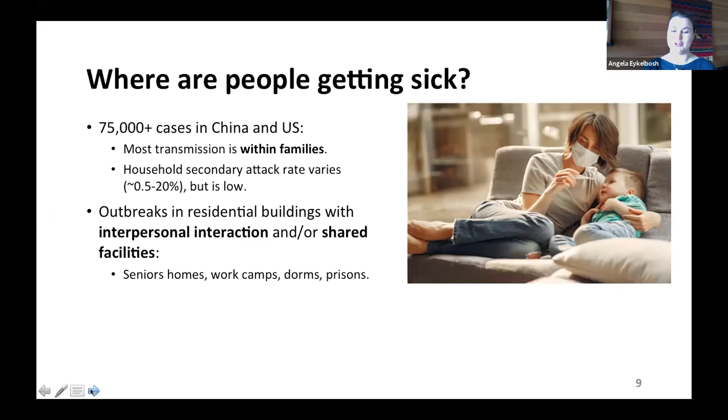We also have had, now you can see in the media, many outbreaks in residential buildings, but all of them have some sort of interpersonal interaction or shared facility aspect to them. So long-term care homes and seniors homes, they have shared caregivers. They have social programming, the bus to the casino. Those are all ways that the virus can spread between close contact between people.

And then in other settings like work camps and dorms, there may be shared kitchens and bedrooms and lounge areas. And then finally in prisons, everything up to the bathroom is shared, right? So there's zero personal space in a prison, which makes them very high-risk environments for this disease.

There are specific instances in which droplet or aerosol transmission has been implicated over a short range. So there was a restaurant in China where one diner seems to have passed the infection to other people sitting in the stream of the air conditioner.

There was a Washington choir where all these people got together and sang at each other for a couple of hours, and something like half of them got sick. There was also a Korean call center that was very crowded and poorly ventilated, where the disease spread pretty far. And this was, again, not long range transmission, it's short range transmission. People are together and that's why they're getting sick.

As for our MURBs, I have yet to see any evidence of aerosol transmission or massive outbreaks in MURBs, or situations where you have reason to believe that people on different floors or in different suites are getting it. That doesn't mean it's not happening. Absence of evidence is not evidence of absence. However, because all these other outbreaks are popping up, the fact that they're not popping up in these particular kinds of buildings is somewhat promising. So we'll just say there's no evidence to date, but I would love to hear if anybody has information that I don't have.

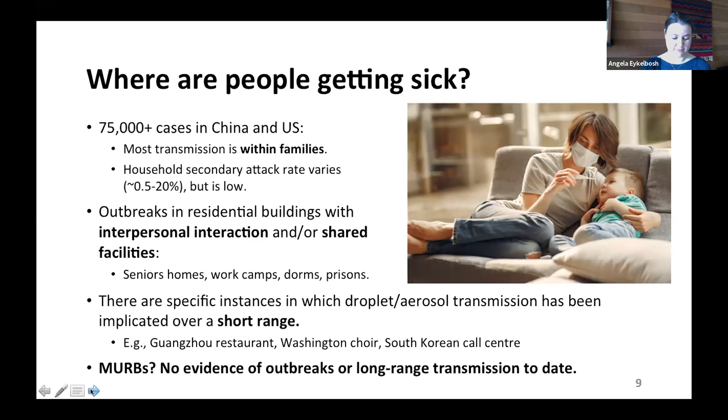So what does this all mean for our MURBs? Well, it means that we need to keep people away from each other. This is critical. So amenities that cause people to gather need to be closed. You need to limit access in elevators and laundry rooms. If they're small laundry rooms, you need to think about how many people can be in there. You need to discourage gatherings. You need to discourage lingering. So, you know, get your mail and then go to your suite.

Don't hang out and be in that space, because you're putting your droplets out into that space, which is what we don't want. And then of course we need to have meetings differently. We can't have face-to-face meetings. So having council meetings and AGMs and these sorts of things by electronic or virtual means is what we have to do. We also need to enhance cleaning. So high-touch surfaces need to be cleaned frequently, and I'll talk about that a bit more.

We also need to prevent cross-contamination in laundry rooms between sick households and not sick. Also in washrooms. And the NCCEH webpage has a poster for this. If you need something to just stick up in your building, we've got a really good one. You also need to close what you can't clean. If you can't keep something clean based on the usage of the thing, or you can't supervise it to ensure that it's clean, or that people are respecting social distancing, then it's probably preferable to close it. That's not an order, but you know, it's common sense.

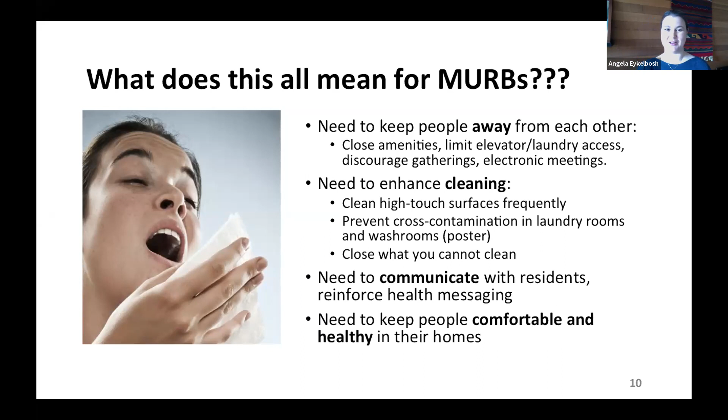So cleaning and disinfection. I'll try to get through this pretty quickly. The Public Health Agency of Canada is recommending manual cleaning with soap and water and/or a disinfectant product. So a lot of people are using those 2-in-1 wipes, which clean and disinfect. Those are different things. Cleaning is removing the soil. Disinfecting is killing the virus. You have to do both. So those 2-in-1 wipes only actually work on lightly soiled surfaces, so keep that in mind.

Some buildings have been reaching out and saying that they're buying specialized disinfectants. That's not necessary. This virus is not a superbug. It's easily killed. And in fact, Health Canada has a product list on their website of all the different disinfectants that you can look to buy. If you need to find one, then you can look on that website.

So frequency of cleaning of the high-touch surfaces, I should specify, is determined by traffic. So recommendations range from 1 to 3 times a day. The pandemic influenza plan here in BC says 2 times a day. However, you have to recognize that traffic may vary. Also, it may be very difficult to contract cleaners right now. So that's a problem that many people have been sharing.

So vacuuming, I've had questions on vacuuming because it creates dust and it can re-aerosolize droplets that have fallen on the floor and dried out. So the pandemic plan for vacuuming says to use a vacuum with a HEPA exhaust filter, and to make sure that the exhaust is not blowing a jet that can re-aerosolize things, but is actually a diffuse exhaust.

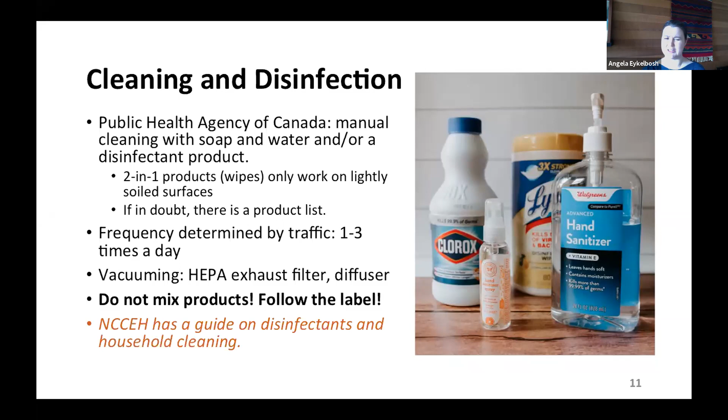And so it's very, very important to always follow the label. Make sure it's being properly diluted, use gloves, use the product properly. It can be very dangerous if you don't. And we actually have an NCCEH document on disinfectants and household cleaning on our website if you want more information on that, especially bleach. Bleach should be used very cautiously.

So spraying and fogging is interesting. People are spraying and fogging, not so much in Canada, but elsewhere, both indoors and outdoors, and they're spraying things like bleach, dilute bleach. Some are using hydrogen peroxide. There's other products that are used indoors because they're not as damaging. The issues with spraying and fogging is that they're going to have very reduced effectiveness on soiled or porous surfaces. So they may not be a good, clean solution.

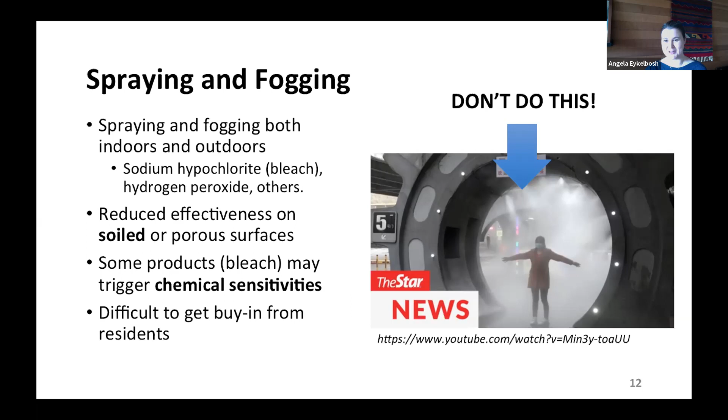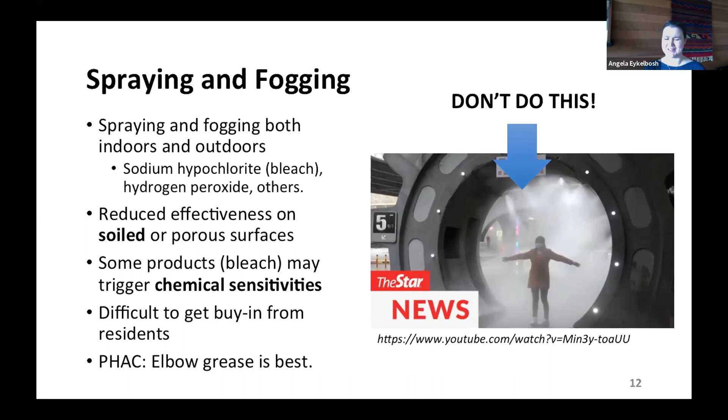They're also not a one-time treatment. If you fog today and somebody goes through there, you must fog tomorrow. So it's not a one-time thing. Some products, especially bleach and others actually, can trigger chemical sensitivities. And for that reason, you may have a lot of difficulty getting buy-in from your residents if you want to try to do this. So overall, Public Health Agency of Canada says elbow grease is best, manual clean, and don't do this thing, what they're doing. That is an extreme example.

So personal protective equipment for staff and cleaners is something we get a lot of questions about. The first best piece of advice is you should always use PPE as per the label on the disinfectant product. So if it says use gloves, use gloves. They can be very damaging to your skin. If you don't have gloves and wipes, for example, then reusable products are also okay.

For rags, you have to launder and dry hot. And for gloves, like kitchen gloves, you just take them off and dry them, and then you only use them for that purpose. You don't try to keep using those over and over again. Or you don't try to use those for other parts of other cleaning, like cleaning in your home. If you're using them for the elevator, they're only for the elevator.

Masking is a really big question. So does your cleaner need a mask? So generally, if the cleaner is in close contact with other people, then yes. However, if they're not around people generally, then they don't need a mask, unless he or she is creating dust.

So even pre-pandemic, if your staff member, your cleaner, is doing something like beating carpets, or they have a really bad vacuum, or they're doing something where they're creating a lot of dust, that's an occupational health hazard, and they need to be wearing a dust mask. So that's regardless of the pandemic. And then finally, some people may wish to use a non-medical cloth mask to protect others, and that shouldn't be discouraged. But if you need more information on masking, the NCCEH also has a guidance doc on masking.

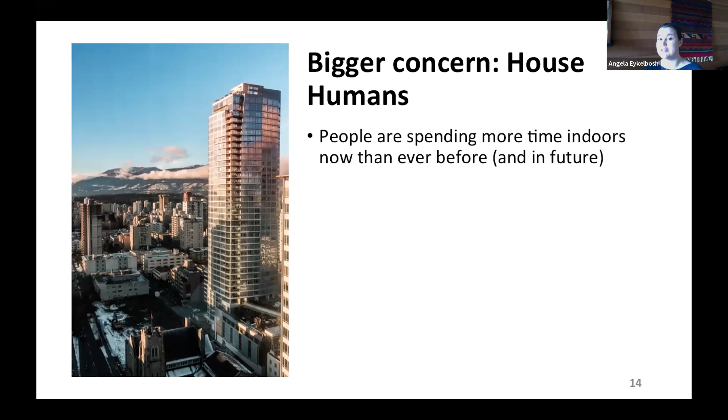So our bigger concern right now is actually house humans. And that is because people are spending more time indoors than they have ever before. And this is likely to continue for some time into the future. So we really need to help people stay healthy indoors. And obviously that happens via a variety of means. But one of the ways that we stay healthy is we are very dependent on receiving healthy indoor air when we live in these MURBs. So this is more important now than ever, that your building ventilation system is performing as it's intended.

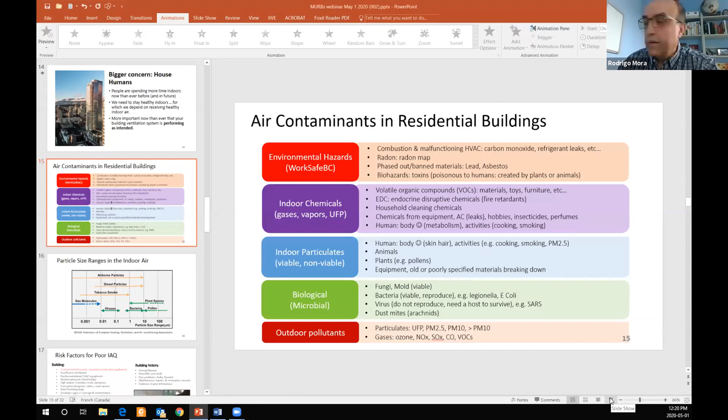So I'll talk about ventilation and air quality. So let's get started with the question: what is in the air we breathe? Unfortunately, we take our air for granted, and we don't realize that air has a lot of stuff. We have gases of nitrogen, oxygen, water vapor, plus so many pollutants that we cannot see. This is just a sample of things that could be in the air. So we have to realize that; that's the first thing.

What can make us sick? A lot of stuff in the air can make us sick. And where does it come from? Well, it comes from indoors, but also from outdoors. The other important thing is that sometimes we rely on our nose to tell us what's in the air, and our nose is not a very reliable sensor because we get adapted. Sometimes we smell things, then we adapt and get used to them. And sometimes we don't smell things that are in the air. So we have to be careful about that.

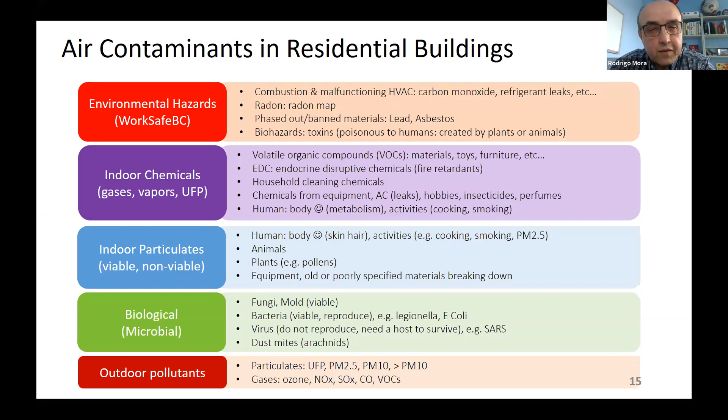So this is for you to be aware that ventilation in buildings, especially in multi-unit residential buildings, is not designed for pathogens. It's designed to dilute lots of stuff that could possibly be in the air in our buildings. So here you can see the range. There's so many particles. The particle size is very important.

What is in the air can be divided into gases and particles. For example, tobacco smoke has a big range. It contains gases, it's an aerosol, vapors, and particles, small and big, so it can travel very far. One thing from the size is that the smaller particles, intuitively, travel farther. The bigger ones stay closer to the source. So we know that.

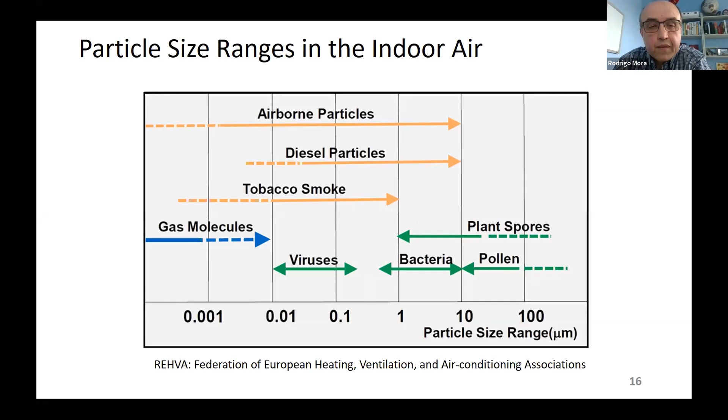We see here the viruses. About 10 microns is the range of the size of particles that remain airborne. Again, the smaller tend to travel farther. The bigger ones, by gravity, tend to fall near the source. Cooking, for example, is like tobacco smoke. It produces gases and particles, and that's why it's so important to have our kitchen exhaust range working when we're cooking, because it produces so many things.

Okay, so we know there's a lot of stuff in the air that can make us sick. So there's a list here of the risk factors for poor indoor air quality. What should we look for? What should we be concerned about in our air quality? We shouldn't be concerned, actually. What Angela was saying is that as long as we behave well. There are many studies that show that indoor pollutants can make us sick. So many things in indoor air can make us sick.

But one thing in common is that our behaviors in our homes are a big contributor. For example, if we produce a lot of moisture and don't use our exhaust fans from the bathroom or the kitchen, we're accumulating moisture, and moisture is like a catalyst for many bad things to happen. So occupants' behaviors are important, and of course the building and its history, what happened with the building in the past. This is a list of things that can happen. Here is the bathroom exhaust and the kitchen, and we have to use them. That's probably the message from this slide.

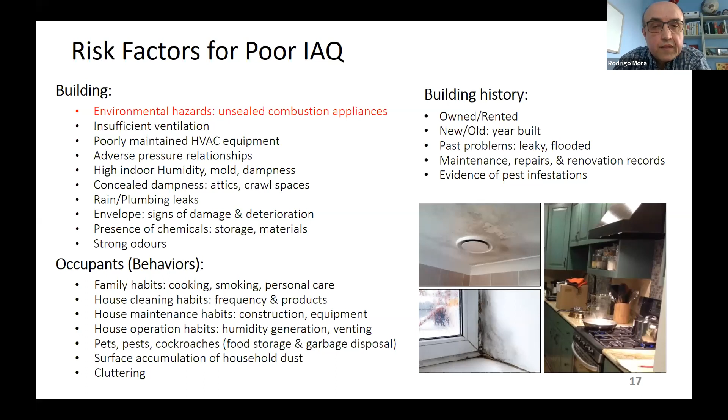So what is ventilation? The definition is important. Ventilation is the intentional introduction of outside air into a space. We're bringing outdoor air that is supposed to be fresh. Typically, we don't expect outdoor air to have viruses or human-generated pathogens, especially in a city like Vancouver. Of course, in an urban area, maybe traffic-generated pollutants and so on, but certainly not pathogens generated by humans. So that's very important.

So what is the purpose of ventilation? One purpose is health. We want to maintain the health of people through good ventilation. Important in the health definition is contaminants at harmful concentrations. Ventilation wants to dilute contaminants so that they don't reach harmful concentrations. That's the goal. There's so many things that could be in the air, and in part we're responsible for those things. So ventilation is meant to maintain concentrations very low, below harmful levels.

And comfort is another factor. We ventilate for comfort because very often we have things in the air that are not harmful, but they produce odors that we don't like. So health and comfort are the two important goals of ventilation.

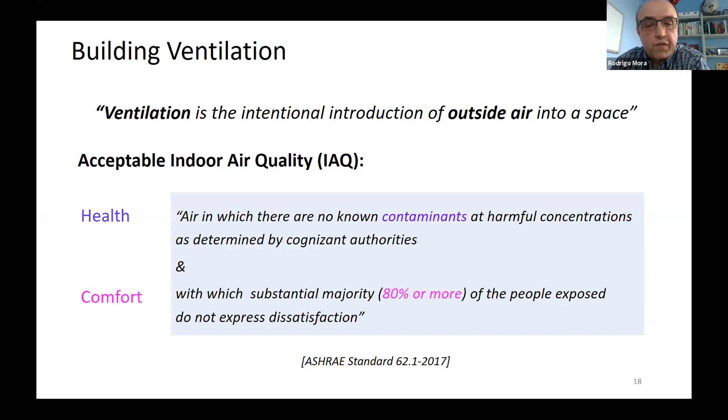So one important thing here: this is a very short time, I cannot be very specific, and there are so many possible cases, so many possible scenarios of operation, configurations of systems. So I want to try to follow a principles-based approach. For us to understand what's going on, we know that air carries particles, gases and pollutants. So basically it's important to control airflow.

So for airflow, in this figure we have the 4P ventilation principles. We know the pollutants; try to be aware what pollutant sources could be in the air. Where are the sources? In our case, humans are the sources. Very often, like you saw in the previous list, the source comes from many possible places. But the important thing is to get informed about the kind of pollutant that is in the air.

Then the driving forces: what drives the airflow that carries pollutants? We have natural and mechanical forces. Stack effect is like a chimney. The building acts like a chimney and drives the air from the bottom up to the top. This is very strong, especially in high-rise buildings and in cold climates, because the temperature difference between indoors and outdoors is high in winter. So stack effect is a strong force that can sometimes overpower the mechanical system.

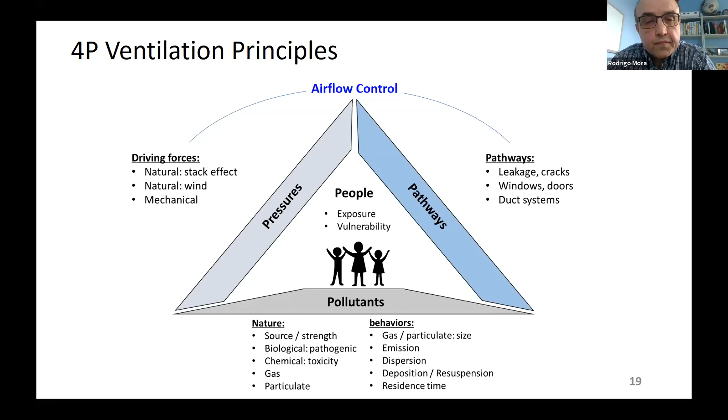Coming back to the principles, there are 5 ventilation strategies that every ventilation system needs to follow. All ventilation systems are not perfect, but they have to follow these principles and strategies. The first strategy is source control: control the pollutant at the source. You replace it, remove it, isolate it.

Examples in residential buildings: the kitchen exhaust fan removes the moisture at the source. The bathroom exhaust fan; the kitchen, with all the cooking-generated smells and pollutants, and also if you have gas burners that have incomplete combustion, you have to operate this exhaust. In a parking garage there's a source of pollutants, so the parking ventilation has to be operational. So this is source control, number 1. I think the list is in order of priority.

Then we have dilution ventilation. Ventilation dilutes, based on the definition, pollutants to keep them below harmful concentrations. So that's very important. Dilution. We need to bring in outdoor fresh air.

The third strategy is contaminant dispersion control. Basically, the rule says take the air from the cleanest areas to the dirtiest areas. For example, in a house or an apartment building, the air moves from the bedrooms and living areas towards the kitchen, the bathrooms, the laundry, the storage areas. It shouldn't be the other way around. This is what is called a cascade effect, from clean to dirty.

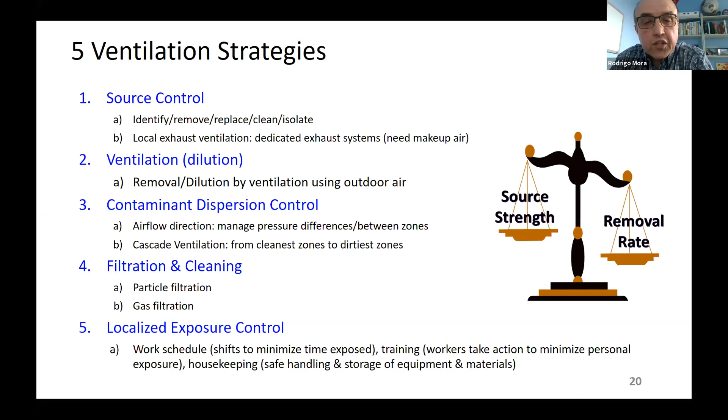An important thing is this balance; everything is about this balance between source strength and removal rate. The removal rate is provided by ventilation, removal of contaminant by these 4 strategies. The first 4 strategies, removal rate. So obviously you want to bring more ventilation to make sure you remove these contaminants at the source or maybe in the air. So removal rate is important. Again, it means bring more air, more fresh air.

And then the source strength, well, it depends on how many people in this case are sick, and if they're concentrated in a place. And if you see a multi-unit residential building, what are the chances that people are spending hours in a place, and they're sick? Well, probably the suite. You're spending most of your time in the suite, so this is probably the most likely source, if you consider that people may be sick. In the corridors, like Angela was saying, people move very fast. So again, source strength is a function of time. So anyway, that's the balance.

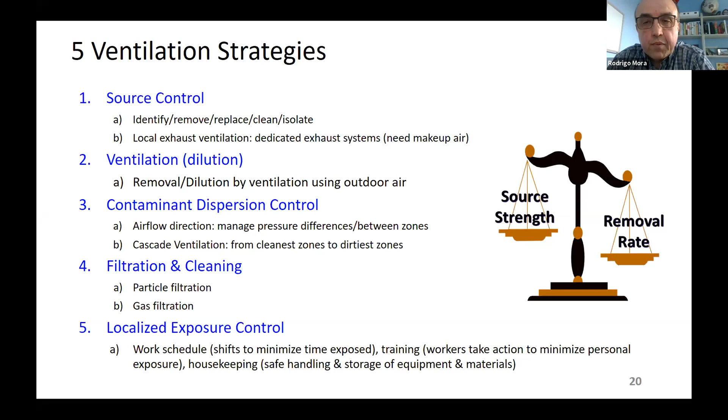That's another important factor. Next thing, we have 4 elements of ventilation plus 1. Now we have heat recovery. So in this slide, I'm going to illustrate how they work. First, again, we have outdoor air. Typically in multi-unit buildings or in residential, this is 100% outdoor air. So it's an air handling system with fans and so on. And now we have heat recovery too in many new buildings. So outdoor air, that's the first element. 100% outdoor air is not polluted with human-generated pathogens typically.

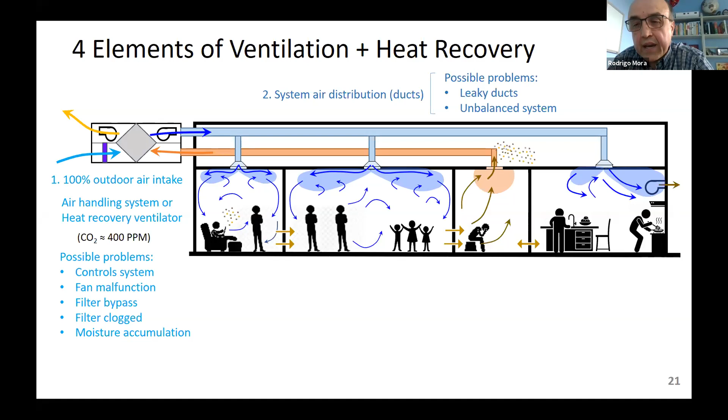Then we have to take this air to the places. We use a distribution system through ducts. So we bring the air from the air handler, using ducts, into the rooms. And then we have air distribution within the zone. So air starts moving and circulating within a particular room. And here, what Angela was saying is important. When there's many people crowding a room, that's probably where you could see that the risk is higher. So fresh air is meant to bring in and dilute anything that could be in the air. Basically, that's the idea. And then the 4th element is air circulation between zones. So air moves between zones following the strategies that I mentioned before.

So if you see this figure, how is the air? If there's a pollutant, typically pollutants in this case are generated by people. We don't expect to have the pollutant in the duct system or in the outdoor air. It is where people are. So in this case, where do we expect to find a pollutant? Where people are.

Another important concept is the age of the air. New air is fresh. So where we have ventilation coming directly into a space, it is fresh air, new air. Then air circulates to other places, it is semi-used air, and then it becomes used air at the very end, in places that you expect are the dirtiest areas. Again, the storage areas or the parking garage or something. In this case, it is a bathroom or another room that has an exhaust. So air moves from supply to exhaust. And then we have heat recovery ventilation, which is more an energy saving measure.

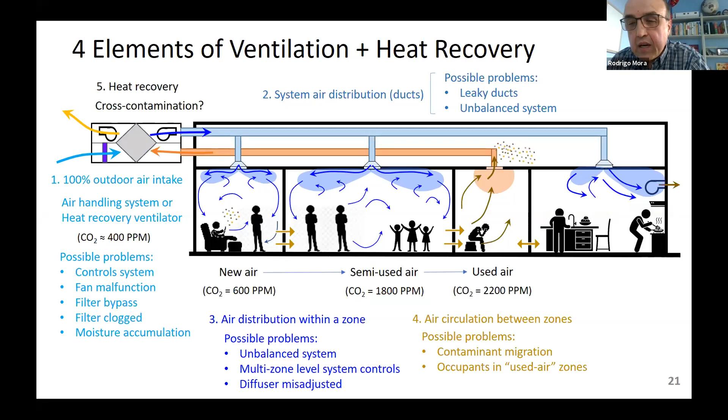So just a very short summary: we have some principles, we have some strategies for ventilation, and every ventilation system should follow those. So what do we want here as a takeaway? First, the ventilation principles I showed are universal and apply to all types of buildings, even hospitals. So ventilation reduces the dose of any airborne pollutant by bringing fresh air, and therefore it reduces the risk of transmission. We know that our ventilation systems are not infallible. They all have weaknesses, and we can discuss in detail about each system and so on.

We don't have time here, but ultimately, they are designed for removing pollutants that you expect in multi-unit residential buildings. They're not designed to deal with pathogens like in hospitals. So what to do during the pandemic?

Well, first, to reiterate what Angela was saying, ensure that the system is maintained and operated as designed. Operate the ventilation system continuously and at specified rates, especially, for example, when people are sleeping; we're spending a lot of time in our bedrooms. Don't try to have custom fixes to open holes or do things on your own, because you may come up with unintended negative consequences and jeopardize the system's performance. And of course, if you're in your suite, open the windows and get fresh air that is coming directly to dilute whatever may be in the air.

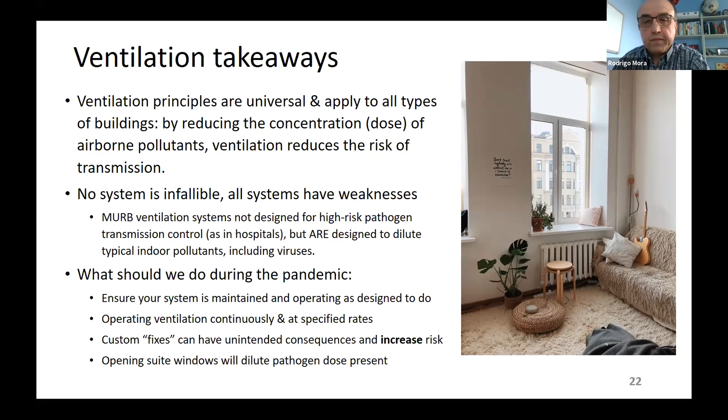Oh, I think that's it. Thank you very much. I'll just, oh, if you want to just go down one slide. Oh, you want to, sorry about that. It's all right. It's all right. I'll share.

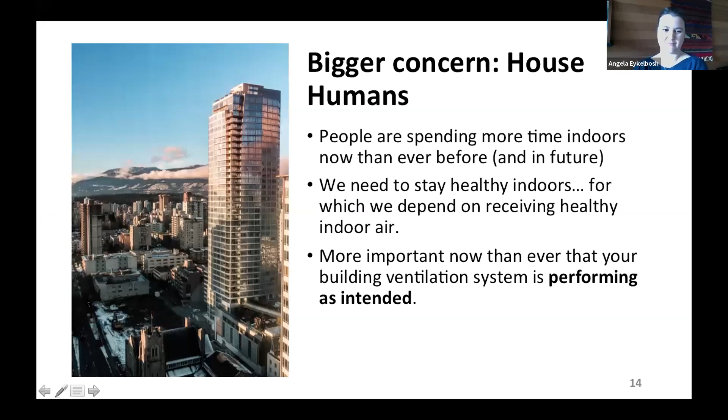So just to sum up all of our information, I have to come back to this again and again. Close proximity is key for transmission here. That means all of our physical distancing measures that we're putting in place are the most important things to be continuing with. Then comes the surface cleaning to prevent cross-contamination between residents. And as Rodrigo has given us in his principles of ventilation, healthy indoor air quality by making sure that the ventilation system is running appropriately is going to promote overall respiratory health and make people less susceptible to being attacked by something like COVID. So making sure your HVAC is running the way it's supposed to be run is really key to promoting your residents' health and comfort.

The last thing I'll say is to learn from this. This is the first wave. You now have experience, or you've been gathering information on what you should do. So think about perhaps putting together a pandemic protocol for your building to prepare for future events. And with that, we can shift over to Hunter and take some questions.

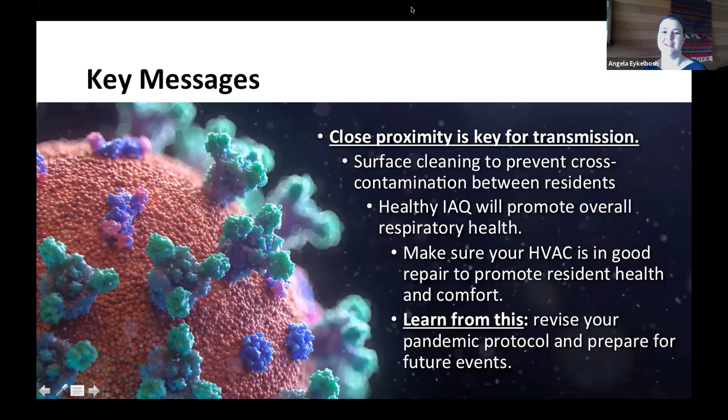Thank you. You can stop sharing your screen. I'll just switch back over to myself. I gotta give up control. There we go. Hard for me to do. Okay.

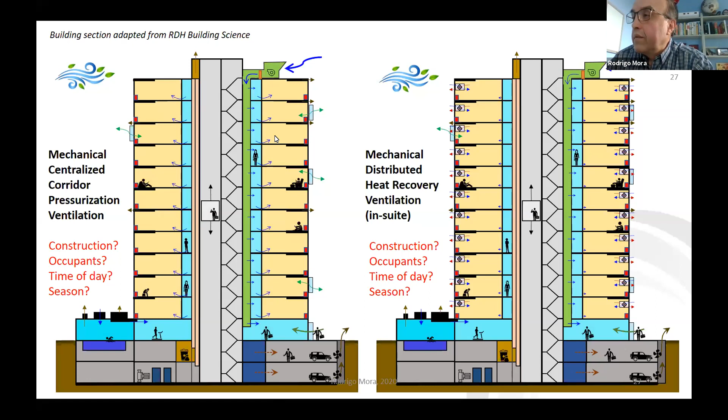Enhancing this effect is not necessary, basically not needed, as long as, again, your ventilation system is working properly. That's the important thing to emphasize here for the previous questions. In this previous slide, just quickly, we don't have a mechanical system, it's not working. So basically we're just subject to the natural forces that are irregular or random and changing daily. So if we don't have a mechanical system controlling, you see the difference between the two slides. That's the intent, to show that.

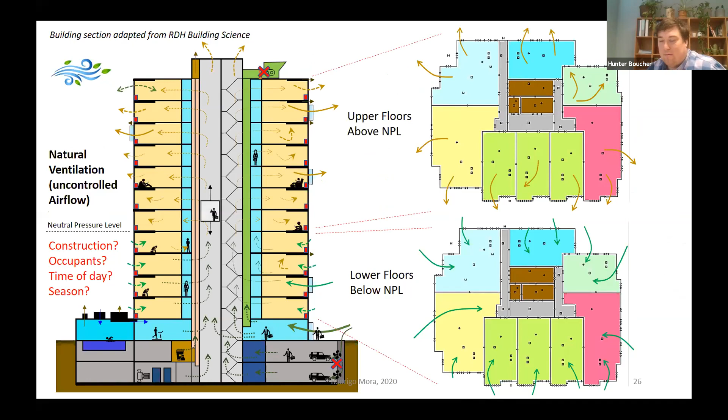Okay. Okay, thank you. So I'll stop sharing. Oh, yeah, okay. So we'll go through just a few more questions. Q&A. Okay.

So a question for you, Angela. If I were to leave a rag soaked in a greater than 10% bleach solution, can I reuse it every day without washing it, using it to wash communal doors and handles, railings, etc.? So if it's staying in that 10% bleach solution after use. That is a very, very strong bleach solution. So I'm going to assume that it's actually not 10%. I'm going to assume that it's 0.5% because household bleach is 5.6%. So if you're diluting that 10 times, then it should be 0.5%.

My personal preference would be to be using clean stuff, and to be very, very careful with bleach. You really don't need that much. I really strongly encourage you to go to our website and find our guidance document. I believe the recommended concentration is actually 500 ppm. If you find that calculator, you'll be able to get the right concentration for use on your surfaces.